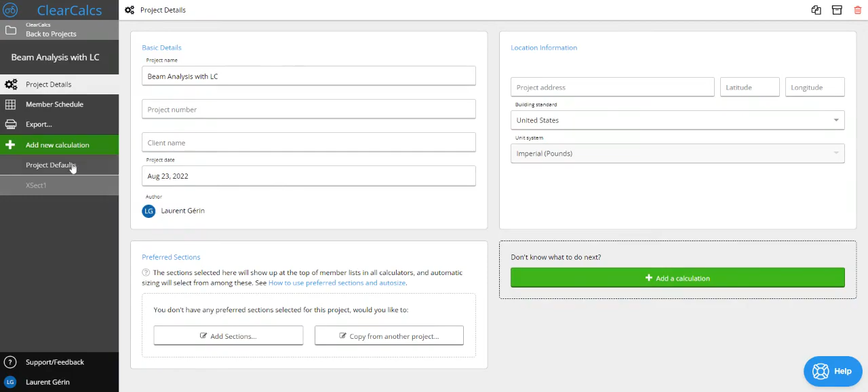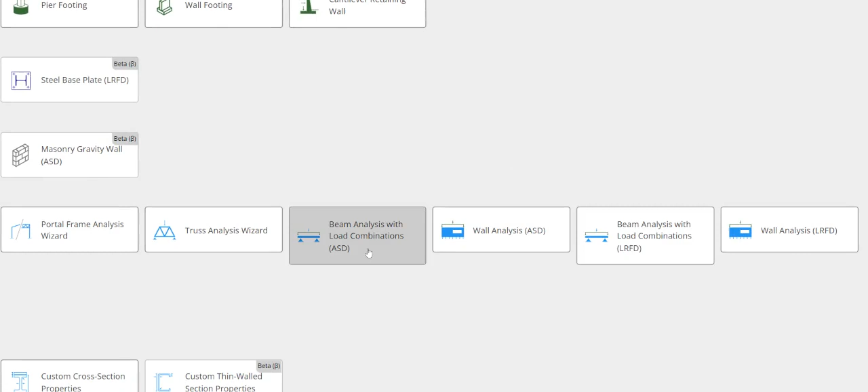Hello, in this short video, we're going to look at our beam analysis with load combination calculator. So I'm going to go and create this now. I'm going to scroll down to the analysis section, and you can see we've got our beam analysis with load combinations ASD and LRFD. These are actually both the same behind the scenes. They just use different load combinations. In this case, we're going to use ASD, but this would all be the same with the LRFD calculator.

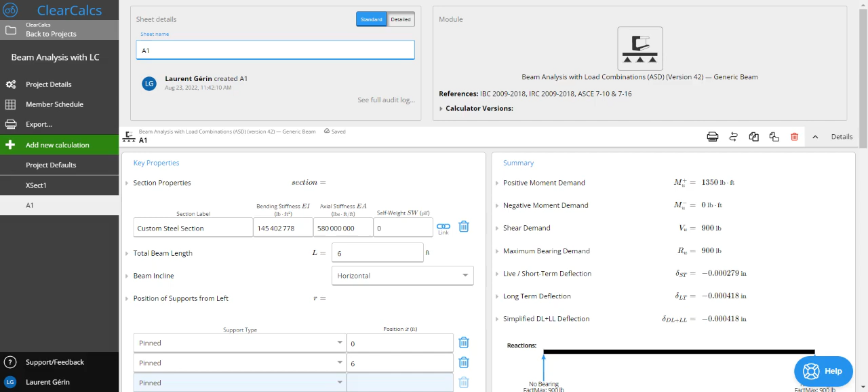So when I click on here, you'll see we've got quite a few different presets. These are all the same calculator behind the scenes. They just have different loads or different span lengths, things like that to represent their specific conditions. In this case, we're just going to stick with a generic beam. So I'm going to go and create this. And if you've used our free beam calculator that's available online, you'll see that this is very similar to that. There are, however, quite a few differences that make this a lot more powerful, I think.

The first one you'll see here is the section properties. We've got our section label. We can enter our bending stiffness. So right now we've got 29 million psi times, so E times I, and the same with our axial stiffness. Now the axial stiffness doesn't actually do much because we're looking at a beam, so you don't necessarily need to worry too much about that.

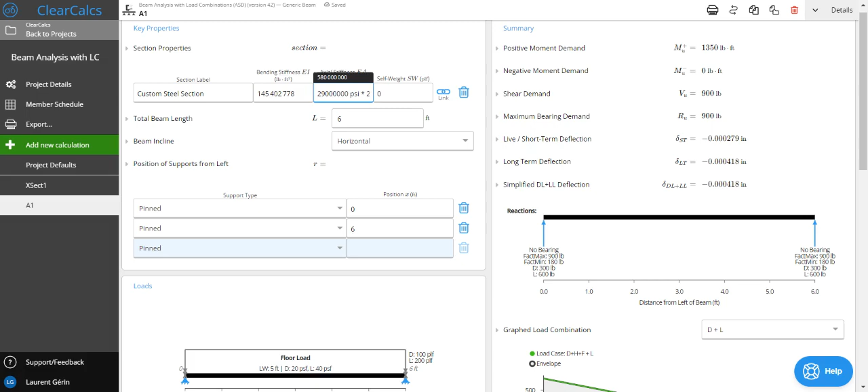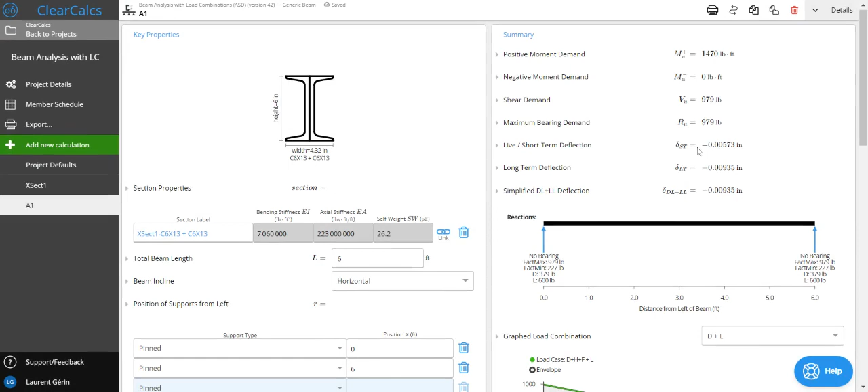But where it gets really interesting is this link button. So if we click on this, you'll see now that I've created a custom cross section. So if I look at it, I've got double channels here. I can select it, and all of a sudden I've now linked my custom cross section to my analysis calculator. So now I'll be able to check the deflections for that custom cross section.

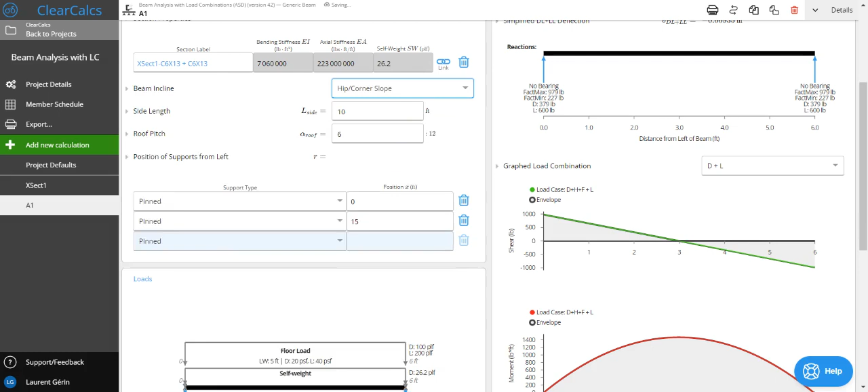So going down now, I've got my total beam length. So obviously this is the total length of our beam, including all of the spans. So if I've got multiple spans, I want the sum of all the span lengths. I can also change the incline to be a simple slope. So if I have a rafter design, or if I have a hip corner slope, so basically if I have a valley or something like that, I can also set that here. In this case, we're just going to stick to the horizontal.

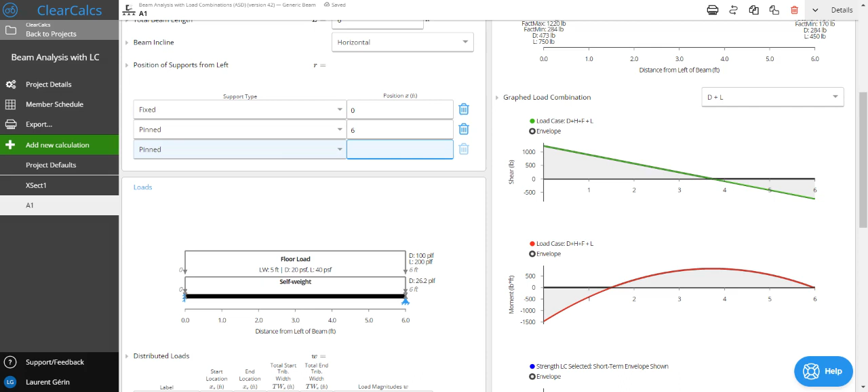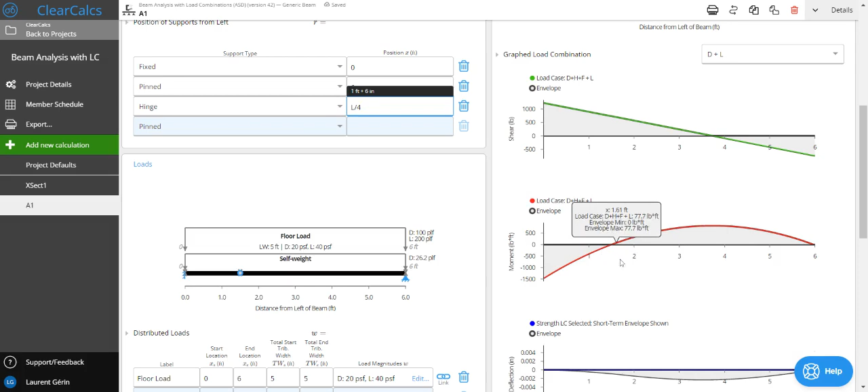I can also move my support. So say if I had a fixed support, I could add this here. I can also add hinges. So say if I have a hinge at, I'm just going to make this up, 3L over 4, so at 3/4 of the length, I could come here and add a hinge here. And as you can see now, we can see our bending moment diagram for this. If I moved it to just L over 4, this really has a drastic impact because there's no moment through the hinge, right?

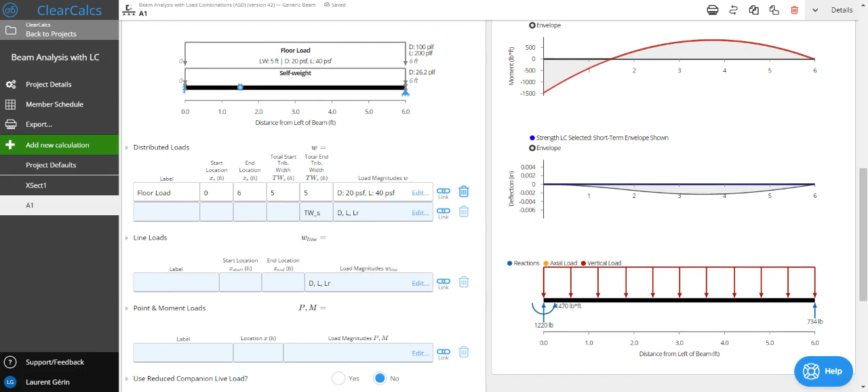So carrying on, I can enter loads in a myriad of ways here. So I can enter distributed loads in PSF. I'll enter the start location, end location, the tributary width at the start and at the end. The different tributary widths would be, for instance, if I have a triangular framing or floor, I could have 5 at one end and 2 at the other end, and then I'd have my trapezoidal load. And as I mentioned, I can enter my load magnitudes in PSF. So here I've got 20 and 40.

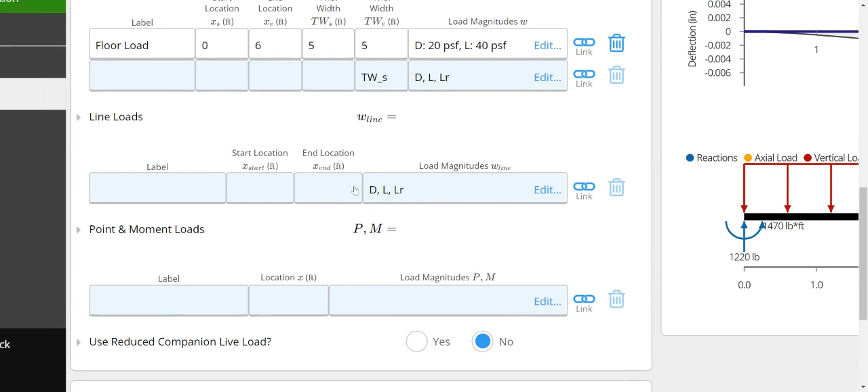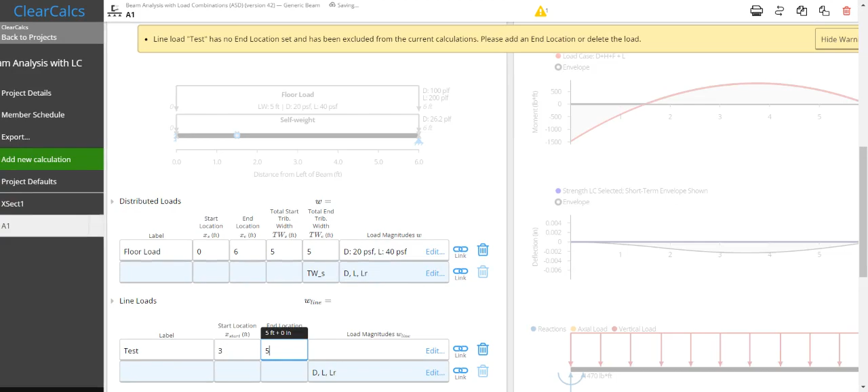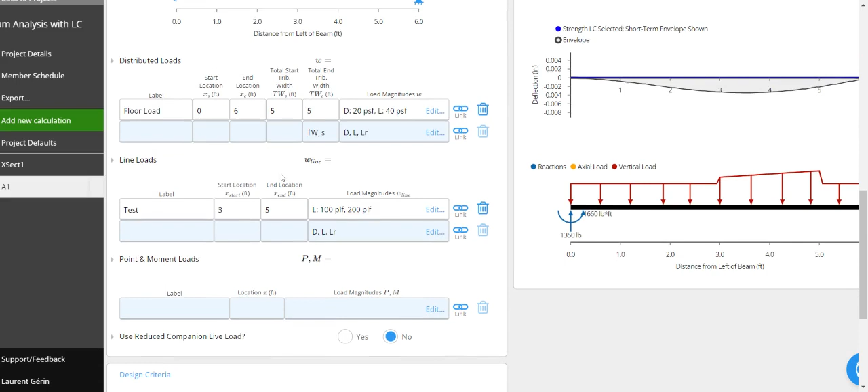I can also enter line loads. So again, these have start and end locations, which you can see on the diagram. So if I start at say 3 feet and end at 5 feet, and I add a load magnitude, I can also have trapezoidal loads. So I can have say 100 PLF at one end and 200 PLF at the other end. By default, it'll just match so that it's the same load. But if I want to override that, I can type in 200, and I've got my trapezoidal load now. I can also enter point loads. In that case, all I have to do is enter the load in pounds, or I can also enter moment loads in pound feet.

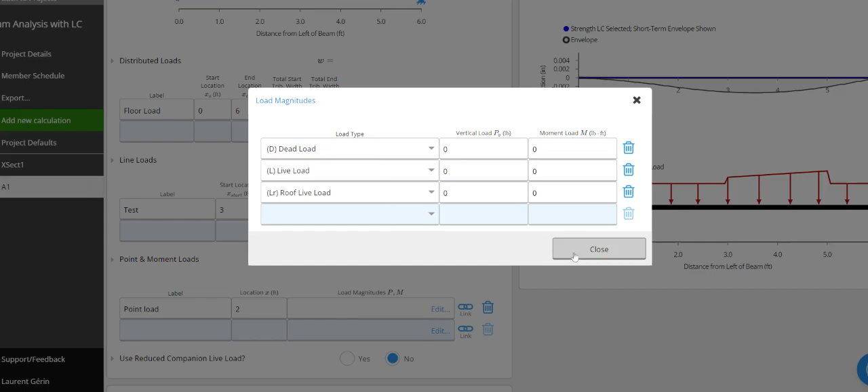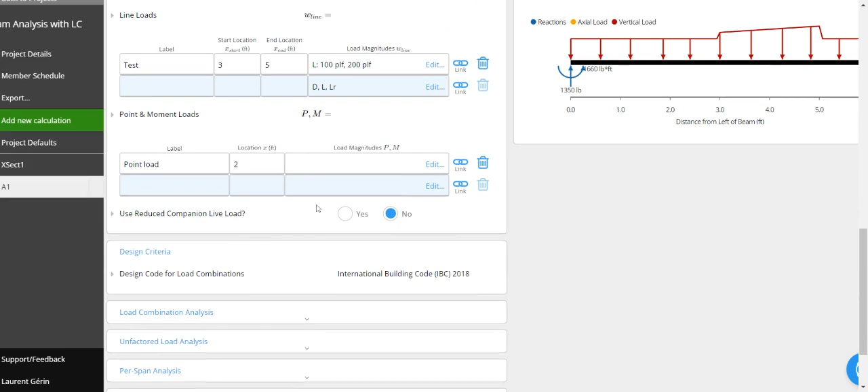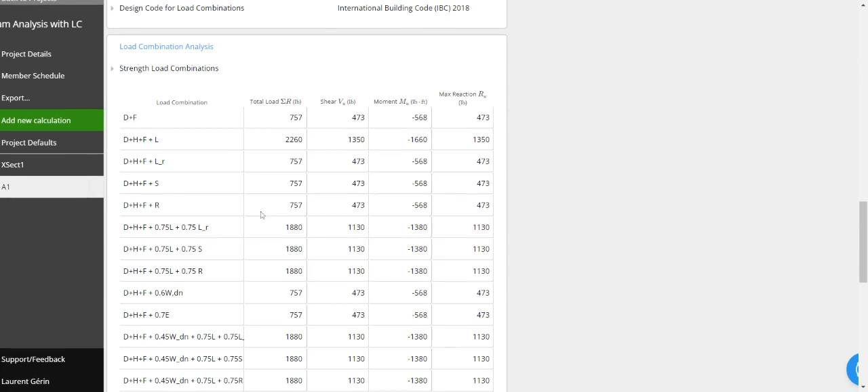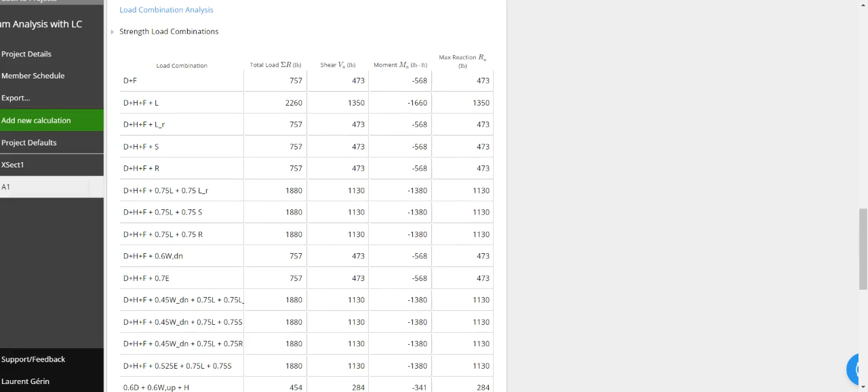Carrying on, if I have specific conditions for my live load, I may be able to reduce this to less than the design combination when it's used in conjunction with other loads. So for instance, if I open the load combination analysis, I can see I've got my dead plus snow, but in some cases I've got my dead plus live and snow. In some cases, I may be able to reduce the factor used on the live load here. So with that, that's about all of the inputs for this calculator.

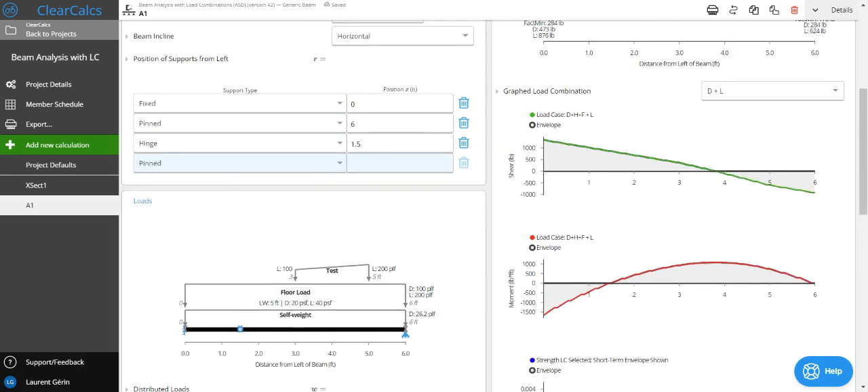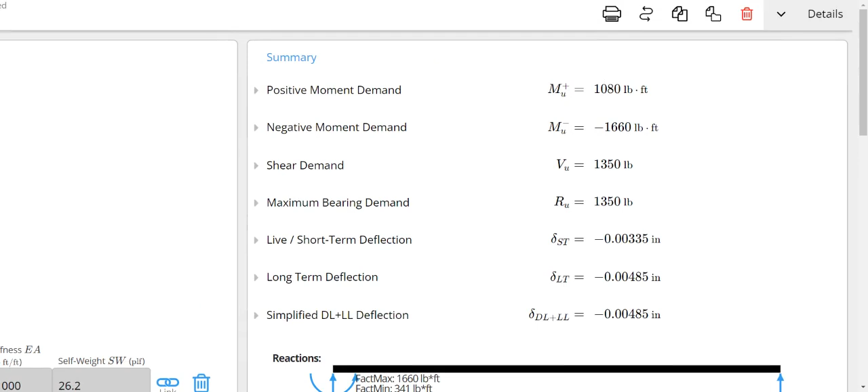If we look at the outputs now, you will see that we show you the positive moment demand, negative moment demand, the shear demand, and maximum bearing. Now do keep in mind, this is an analysis only calculator, so we don't actually do the design checks on this. You'll be able to do that in a separate calculator. But we also show you the deflections, and these are calculated based on the actual cross-section that you've linked or that you're just choosing to design. You'll also see the reactions on the beam.

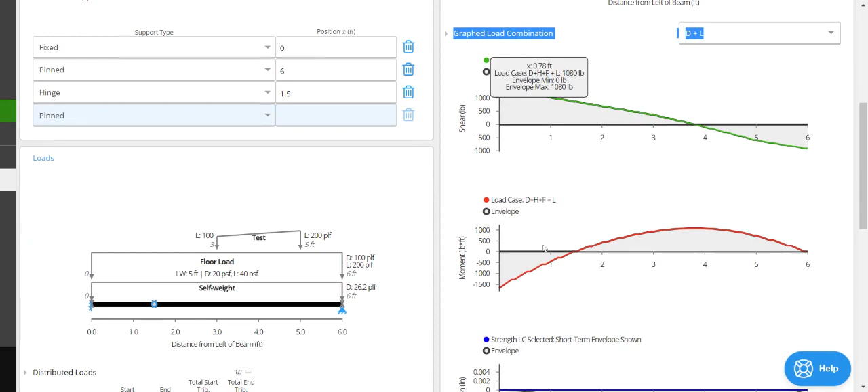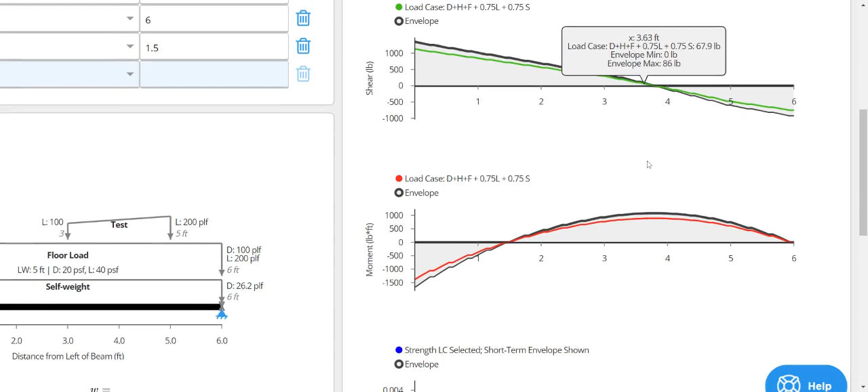You can also see our load combinations. And if we go to this tool here, we can select different load combinations. Let's say if I want to look at live and snow, I can see this, and there's still the envelope that'll show up to show the maximum. I can also see my free body diagram here. If I wanted more detailed information, I can also go on the left here, and you can see, say for unfactored load, my dead and my live have their specific shear and moment for only those loads.

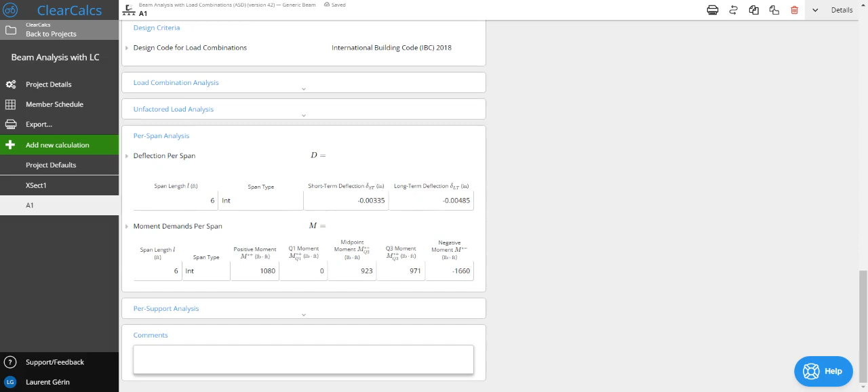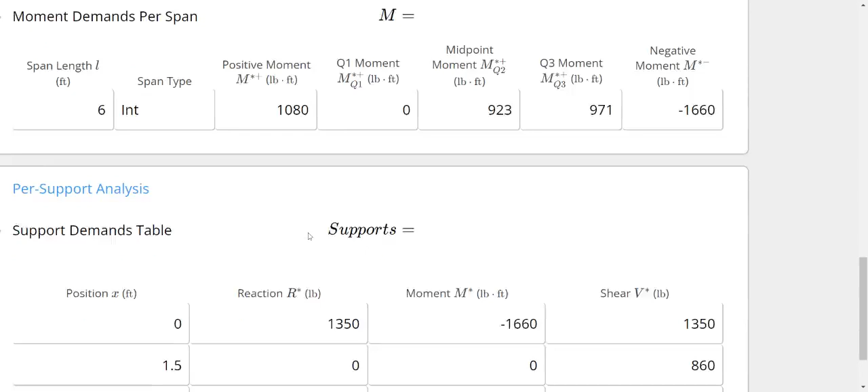And then I can also see things for spans. So I've got my short and long-term deflection, my moment demands. I've also got my quarter moments in case I wanted to use this for a lateral torsional buckling analysis where I want my equivalent moment factor. And I can also look at loads per support, seeing the reaction, the moment if it's a fixed connection, and the shear at the support. So that about concludes our video here.